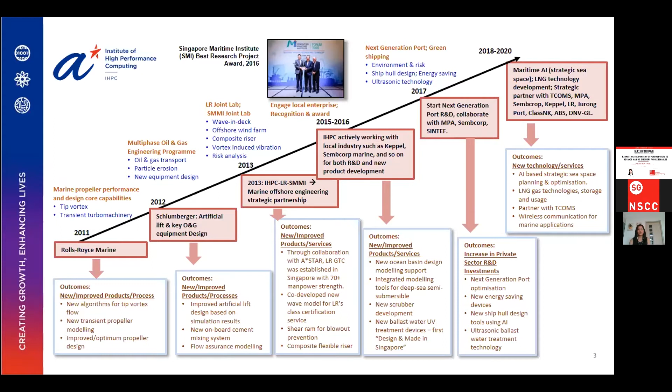Okay, back to our topic. Digitalization is a technology trend in these days. Everybody's talking about digitalization, digital twins, as a model of your physical vessel. Digital twin provides every bit of information for the physical models, from engine performance to the hull integrity.

With the digital twin, operators can optimize their specified voyage in terms of fuel consumption and the time of arrival. So they also can make efficiency plans for their inspection and maintenance. So the industry is taking the advantage of digitalization, moving towards green shipping and eventually to autonomous operations.

So in this journey, what can high performance computing help? Here we're talking about the high performance computing. Actually, we are talking about computational fluid dynamics.

Compared with the traditional model test or sea trials, the high performance CFD based Virtual Lab can provide access to all the fluid field variables, and also provide flexibility for your tank layout and experimental design. So it's not only helping with the performance evaluation, it also helps a lot with the design optimization.

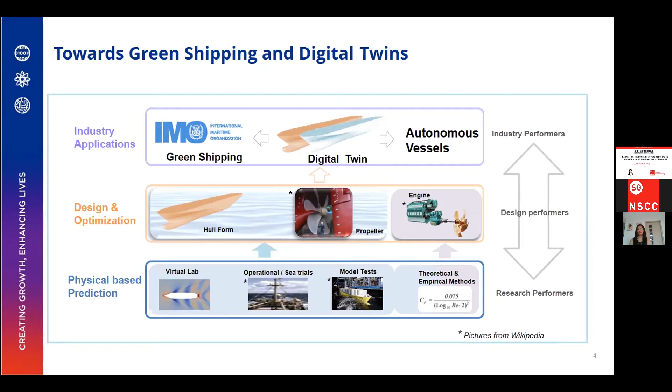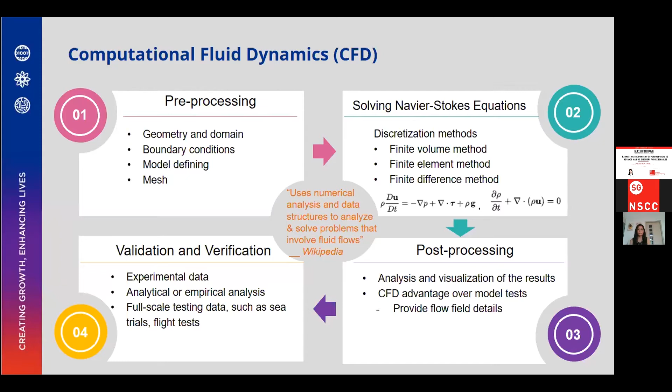So for those who are not familiar with CFD, actually CFD uses numerical analysis and data structures to analyze and solve problems that involve fluid flow. Here I quote Wikipedia. So normally we have 3 steps to do the CFD: pre-processing, solving, and post-processing steps.

In the pre-processing step, with your geometry, you need to define your domain and the condition that your boundary will not affect the flow inside your domain. You also need to consider what physical models are involved in your problem, and according to that, define your CFD model.

Then we do the meshing to discretize your domain. After that, we solve our governing equations—basically the continuity equation and Navier-Stokes equation—to get the information of your flow field as pressure and velocity. With the results, at the post-processing step, we can visualize the results to help us understand the physical insight behind the flow.

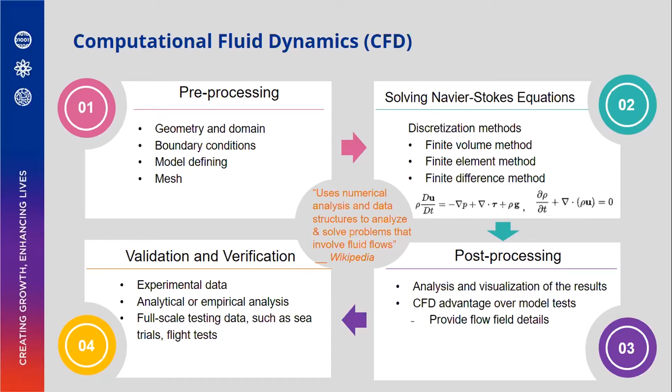So normally this finishes our CFD procedure. But in order to get everybody to have confidence in our results, we add one more step to validate and verify our results by comparing with experimental data or analytical or empirical analysis.

Just now I mentioned CFD-based Virtual Lab can help with performance evaluation as well as design optimization, so we developed our Virtual Lab starting from these two aspects. For the physics-based simulation side, we developed our tools for extreme wave generation and current-wave interactions. We also developed near field, far field coupling models and dynamic meshing tools to improve efficiency for complex problem simulations, and tools to analyze structural response considering mooring dynamics.

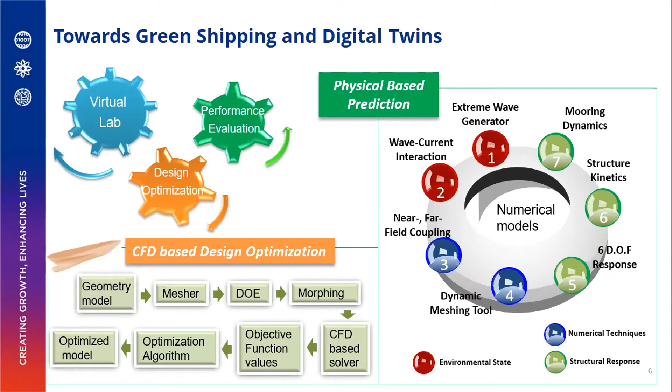For the CFD-based design optimization side, we developed our code based on current popular data-driven design optimization methods, as well as traditional optimization algorithms. So let's look at our Virtual Lab development.

For the performance evaluations, the first tool I share here is a wave generator. In the real sea, a lot of nonlinear phenomena we have to deal with, such as wave breaking, viscous drag, and turbulence effects. All these are beyond the potential flow theory's capability, so CFD can handle this very well, and we developed a wave generator in our Virtual Lab.

With our code, we can generate waves according to wave theories like Stokes first order, second order, even fifth order series, to generate regular waves. We can also generate waves according to JONSWAP spectrum or PM spectrum for irregular waves. At the same time, our code can also generate waves according to the physical movement of paddles.

Like the animation shows here, it's actually a paddle generating waves. We can also include a damping beach, similar to a physical tank's beach damping zone. With this, you can see our simulation results match the experimental data quite well.

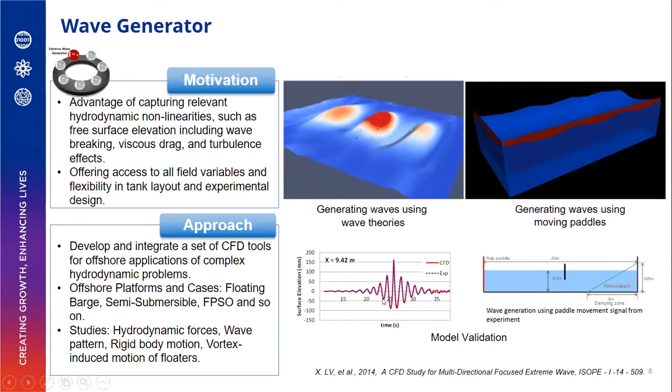The second tool I share here is wave-current interaction. We start from current and wave only. For the current-only case, we capture the mean velocity of the current, and with different methods, we can also capture the turbulence kinetic energy profile of the current.

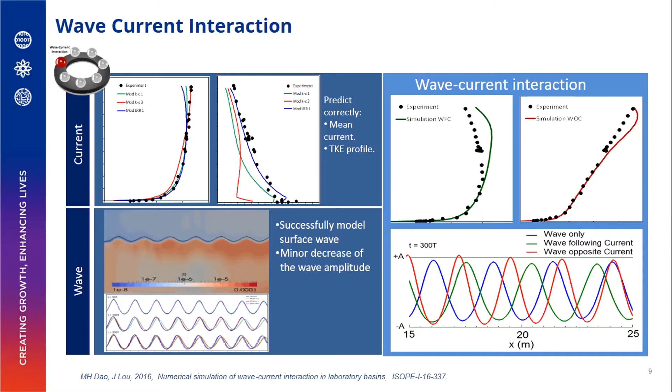For the wave-only case, we capture the wave profiles. We try to minimize the decay with wave propagation, making sure our profile can keep quite well after a certain wave period.

For the wave-current interaction, you can see that when they interact, the current profile and wave profile change a lot. When the wave meets a following current, it will display a sharper crest and flatter trough. When the wave meets an opposing current, the wave period becomes shorter, and the waves normally pair up with each other and can even induce an extreme wave or wave breaking. Our code can handle this kind of problem.

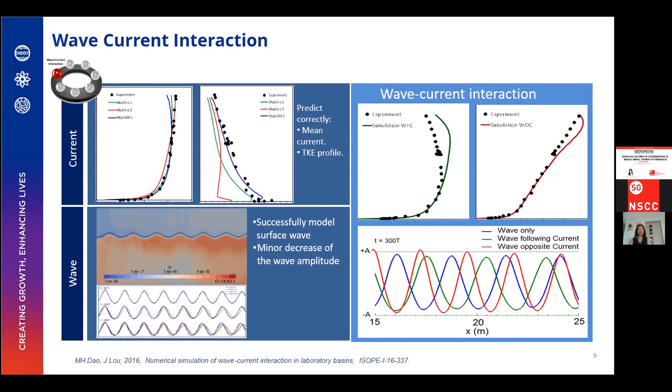For cases with structures in waves, the problem becomes very complex. We need to deal with incident waves as well as disturbed waves around the bodies. Because the incident waves require quite a large domain, and the disturbed waves require fine mesh around the body to capture turbulence and wave breaking cases, all this increases our computational costs in terms of time and resources.

Even with NSCC's supercomputers helping, we need to do our work smartly. We cannot ignore cost and just do it—we need to find a smart way. So we thought, why don't we couple potential flow and CFD together to improve efficiency?

For the far field waves, where wave linearity can be justified, we can use potential flow to simulate it. For the near field part, we have to use CFD with fine mesh. So we couple them together, and at the interface buffer zone, we use interpolation to exchange information between these two methods.

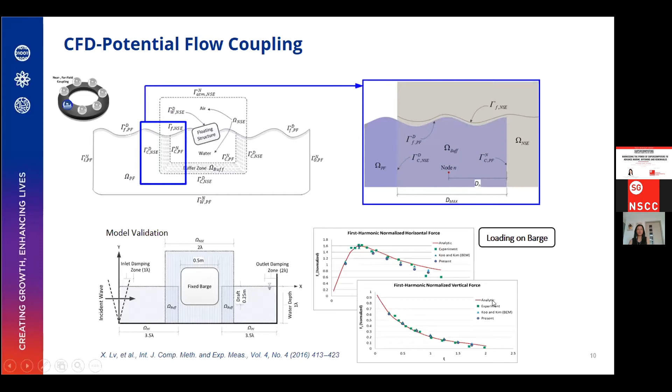With the barge case as an example, we can generate the incident wave using moving paddles. In the far field, we use potential flow to capture the waves; in the near field, we use CFD to do the simulations. We can see our simulation results match the experimental data quite well.

Just now I shared a case for coupling the two methods, CFD and potential flow. We still have a lot of complex problems to handle. For structures inside the domain that have movement and travel across a long distance, we cannot keep a large domain to simulate the case.

So CFD scientists developed this overset mesh method for ships with a rotating propeller, for the launching of torpedo anchor, or the launching of a lifeboat from a platform. We can use this method.

With a sphere dropping into water as an example, we have our background mesh and a mesh around the body. The overset mesh follows the body as it moves, so we don't need to regenerate any mesh, and we don't need a very big domain to capture the whole phenomena. We only interchange information at the interface of these two meshes.

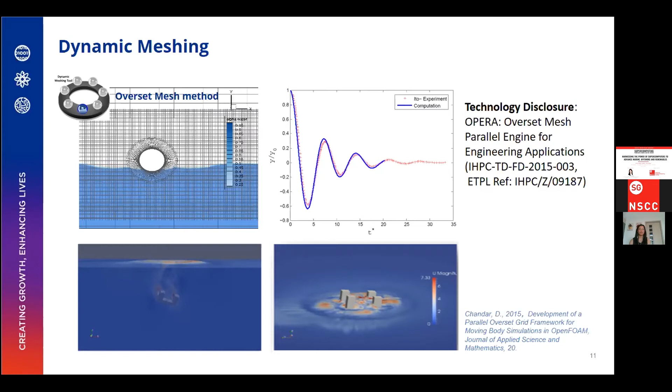A couple of years ago, my colleague Dominic developed this overset mesh for the open source CFD software OpenFOAM. The development earned recognition from the OpenFOAM Society, so we filed a TD for this development. Currently, commercial CFD software like StarCCM and Fluent all have this kind of function, which is quite convenient for dealing with relative motions of structures.

Another tool we developed is for structures in current. It seems simple, but when current flows through structures like a semi-submersible, it always has vortex shedding behind the structure. The shedding vortex will induce motion of the structure, which we call VIM. For this case, we use large eddy simulation to capture the VIM.

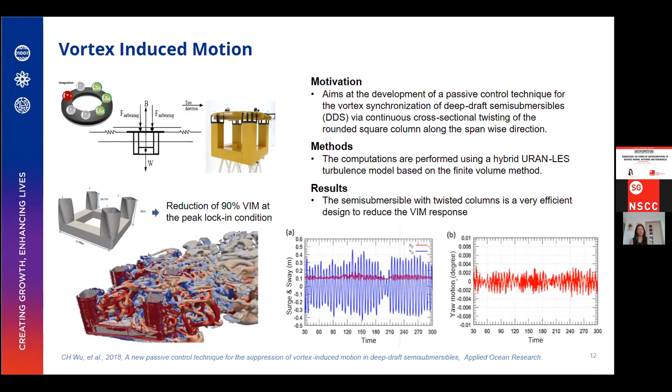After validating our model, we used it to find a passive control method for the VIM. Our simulation found that a twisted column will have suppressed VIM. This result shows that for this particular case, our simulation results show we can reduce VIM by 90% at the peak lock-in conditions.

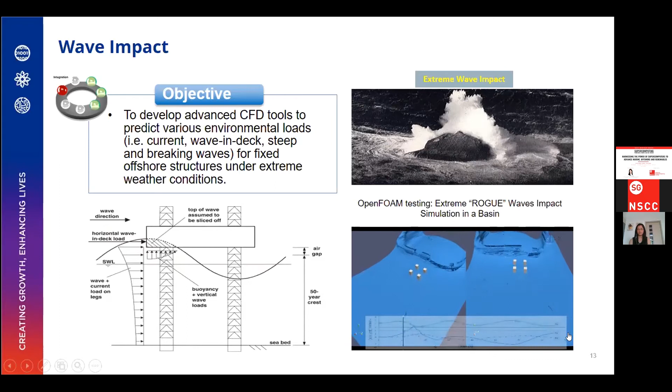With our code, we can also capture the wave profiles and wave breaking. At the same time, we can monitor the force on the structure, the wave load on the structure. We still have a lot of tools and examples, but I won't share them here due to time limitations.

Now let's look at the design optimization tool development. Traditional CFD-based design optimization starts with the initial shape, uses CFD to get the objective functions, then according to design criteria decides whether your criteria is satisfied or not. If not, optimization methods are used to determine the changing directions to find a new shape and go back to the next loop.

There are lots of design optimization methods, each with its own advantages and disadvantages. Gradient-based methods have high efficiency and are easy to apply to sizing, shape, and topological designs, but cannot be used for discontinuous functions. Stochastic methods and neural network methods that can be used for any function, including complex problems, but normally take more iterations to reach the optimum, so efficiency is not so high.

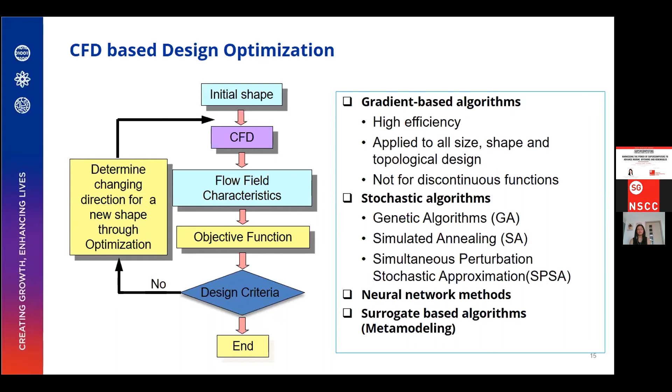Currently, database methods and machine learning methods are quite popular, so people are looking at surrogate-based algorithms. For CFD, given the initial and boundary conditions, we use full order models to get the objective functions. For surrogate models, people try to reduce the order or use simpler methods to get the objective function to improve simulation efficiency. We can categorize surrogate models into three types: data fit surrogates, multi-fidelity surrogates, and reduced order surrogates.

Data fit surrogates basically build up a database, using either CFD or experimental data. From the database, they build up a response surface, and on that surface they find the optimum. So it has high speed up, but must balance local consistency with global accuracy.

For multi-fidelity surrogates, we use coarser mesh to improve computational efficiency, so the accuracy is not as high.

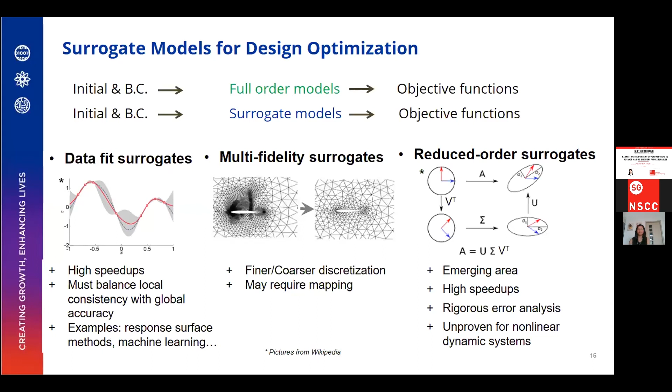Reduced order surrogates are an emerging method. Basically, it uses singular value decomposition to project the function from a full order space to a reduced order space. It's quite promising, but still needs further development for nonlinear dynamic systems.

With surrogate models, the design optimization problem becomes like this: from your initial design, you define your design space. Within your design space, you design your experiments to form the DOE, and use CFD to collect the objective functions. Of course, here we're talking about CFD-based methods, but if you have experimental data, you can also use that to build up your database. From here, you build up the surrogate models.

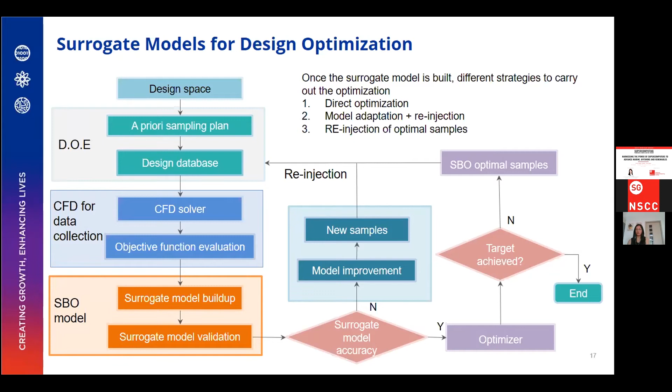According to the surrogate model accuracy, you decide whether to go further to optimization or go back to increase your DOE. If the surrogate model accuracy is high enough, you go to the optimization part and check whether your target is achieved or not. If not, you re-inject the optimum samples back to the DOE. As your DOE data increases, your covered range increases, so it can go nearer to the optimum points. Okay, the design optimization methods we already have.

Evaluation for performance we also have. So we are considering developing a platform which is user-friendly and has high efficiency for industrial applications. A smart platform requires automatic analysis for performance evaluation to improve efficiency, and it also requires design optimization methods to reduce dependency on designers' experience. With this, we can get innovative designs.

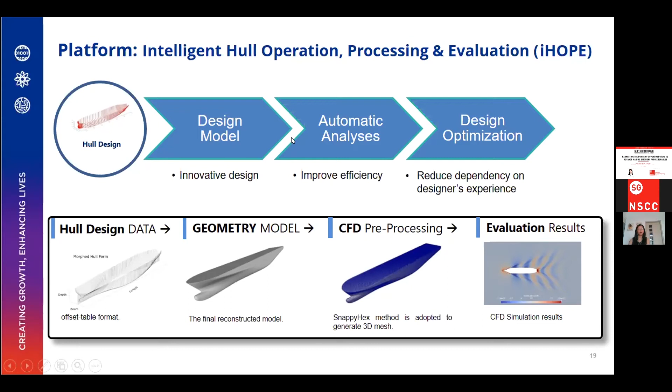But when we develop our platform, we found there's still a gap between the design model and the automatic analysis. Why? Because the designer only cares about the shapes and dimensions of their design. They only tell the manufacturer what the shape looks like, how to generate it, and what the dimensions are. But as safety engineers or scientists, we care about the geometry, whether it's watertight or not. If it's not watertight, the fluid flow will go into the structure, which is not the real case.

So every time we get the model from the designer, we find there are lots of problems: small gaps, holes, overlap surfaces. We need to fix this. Normally for a simple case we may take days, but for a very complex case, like the FPSO topside or jack-up topside structures, it's very complex - it even takes weeks. This is something we don't like.

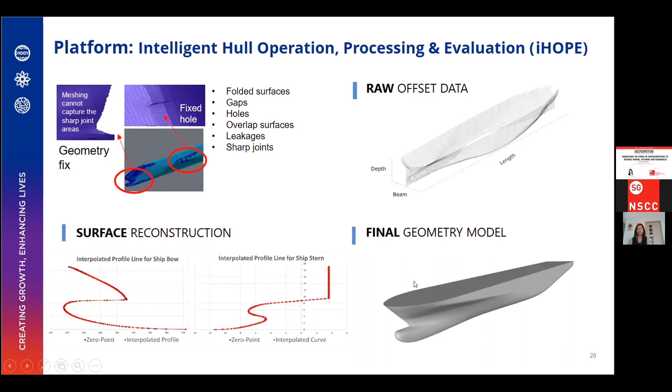So we consider - we have geometry modeling experts - why not go back one step? We start from the raw offset data, regenerate the structures, and form our watertight geometry model. Currently, this step has been finished, and we developed a platform.

Currently this platform does not include the design optimization part - it goes from the offset data all the way to the performance analysis. The user only needs to provide the offset data, click on the geometry generating pattern, provide the hull dimensions and operation conditions, and can do the computation and visualization to check the results.

This tool is not only a design tool for industrial applications, it can also be used as a teaching tool. It was tested by SIT final year students, and they found it's quite user-friendly with very high efficiency. It can help students understand the CFD procedures and how to do hull performance evaluations.

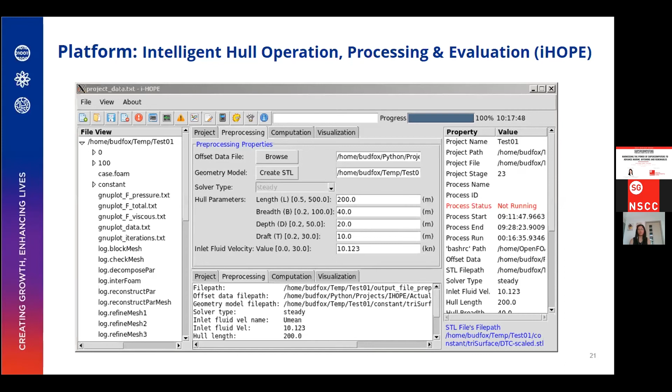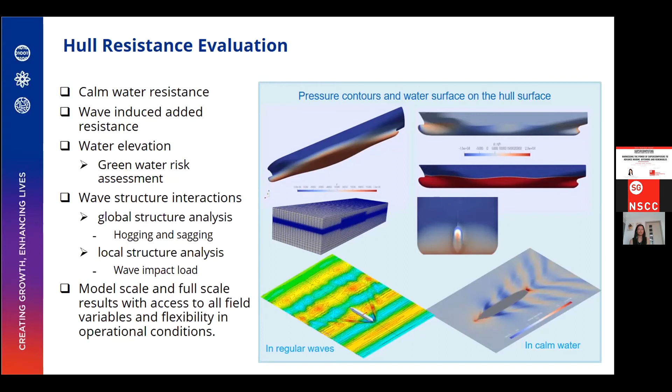Let's look at our Waterlab's application in green shipping and digital twins. IMO has already set a target by 2050: they will cut greenhouse gas emissions by at least 50% compared with 2008 levels. To meet this target, we need to optimize hull performance, reduce resistance, and increase efficiency to reduce energy consumption.

And further reduce the greenhouse gas emissions. Our tools can help evaluate hull resistance, either calm water resistance or wave-induced added resistance. Our tool also can help you get the water elevation along the hull, so you can use it to do green water risk assessment.

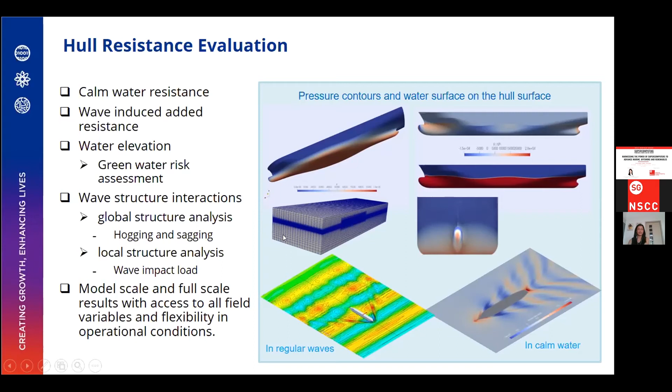Again, for CFD, you can either do model scale simulation or full scale simulation. It can provide access to all field variables and flexibility in operational conditions. For instance, we can provide the pressure distribution on the hull surface. With the pressure information, you can do global structure or local structure analysis for your hull slamming, or impact load analysis.

Improved efficiency is a good thing, but it doesn't always lead to good results. For propellers, increasing demand for efficiency drives the situation where, in normal operations, the surface ship cannot avoid cavitation. We know cavitation has a lot of problems - it produces vibrations and noise, accelerates wear of components like the rudder and bearing shaft, and also causes blade erosion and consequently corrosion and damage to the blade. So we need to consider how to balance efficiency and cavitation.

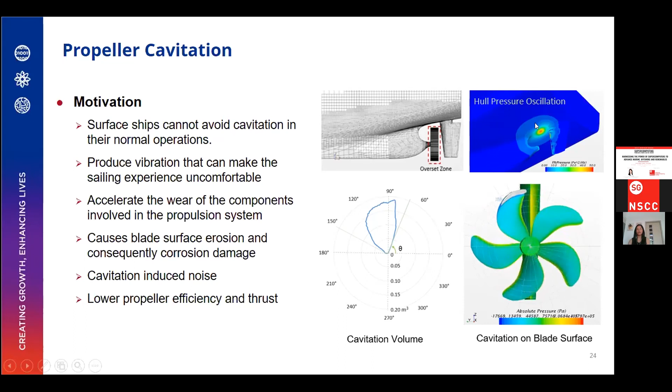IMO's target for greenhouse gas emissions also drives operators to transition away from high polluting fossil fuels. So LNG, as a cleaner fuel, is being explored by lots of people. But for LNG, you have to deal with the boil-off problem, because boil-off can happen at any time, any stage of the whole supply chain - from storage, transportation, to the bunkering procedure. As long as there is heat ingression and pressure change in the tank that makes the temperature higher than the boiling point of LNG, boil-off will happen.

According to the excess temperature, the boil-off phenomena happens in 3 stages: either nucleate boiling, transition boiling, or totally separated two-phase flow boiling. So for CFD, we have three kinds of models according to the boiling types, so it can handle this problem very well.

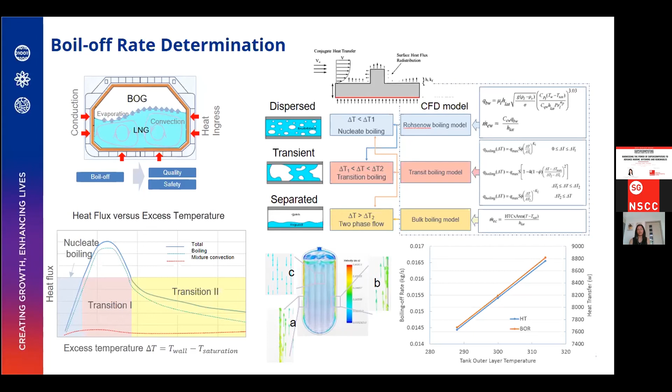So IMO not only sets targets for greenhouse gas emissions, they also have developed regulations for ballast water management to protect our environment.

With our code, we can help monitor the movement and distribution of sediments inside the ballast water tank. It can help the operator make a cleaning plan and find feasible and practical cleaning measures. We can also do parametric studies about the de-ballast suck pipe positions, lightening hole size, position, numbers, the bellmouth locations, particle size, water jet pressure, and temperatures. All these parametric studies can help the designer design their ballast tank or modify their current tank to achieve better ballast water management.

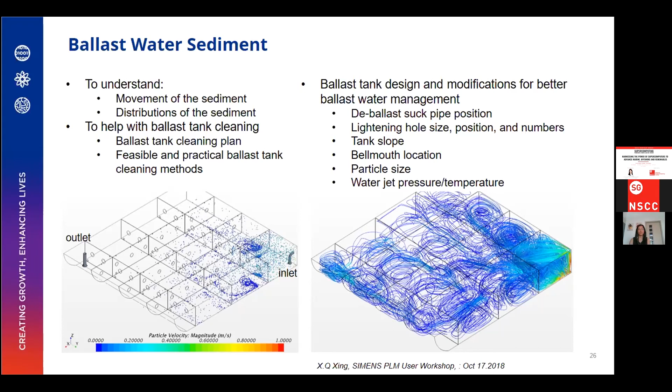There are lots of cases I will not share here due to time limitations.

For tidal turbines, our code can help not only with the design, but also performance evaluation at design operation conditions and off-design conditions. We use MRF mesh to capture the motion, the rotation of the blades. Near the blade surface, we need fine mesh to capture the feature lines of the blades. Otherwise, it will affect the accuracy of your results.

This case is a misaligned case, where the current is misaligned with the tidal turbine shaft by a 30-degree angle. Our results are quite clear for the industry to understand what happens and what the flow field looks like.

At the same time, we also care about the wake flow behind the turbine. Why? Because when you design your turbine farm, you need to understand where to put your turbine downstream. You cannot put it under the previous wake zone, as it will definitely affect the performance of your turbine.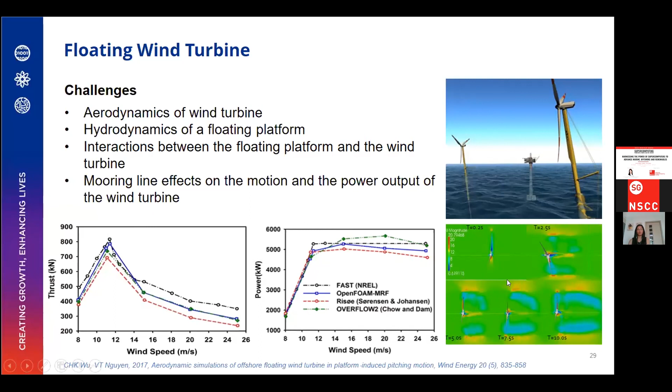With this, I summarize my presentation here. High performance computing will definitely benefit the marine offshore industry and offshore renewable energy sectors, making performance prediction and design optimization more efficient. It will help the industry move towards green shipping, digital twin, and lead to autonomous operation eventually.